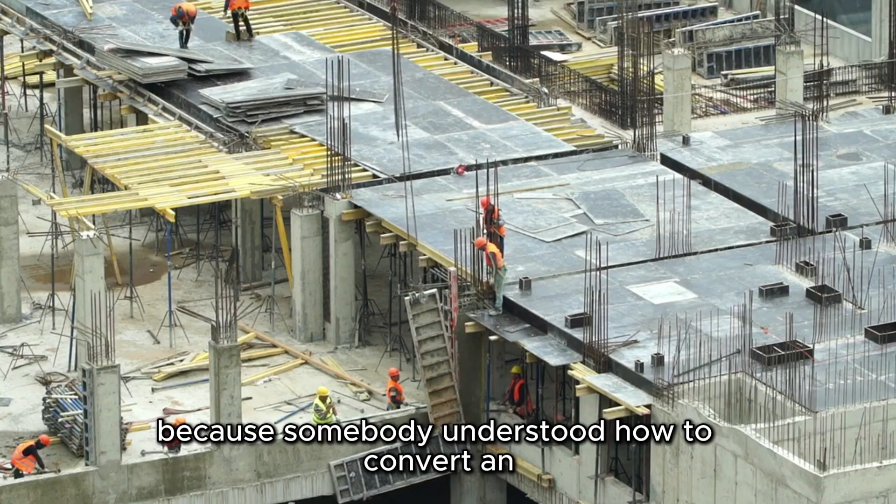Whatever your background, I want all of you to understand one thing from the beginning: you are entering an industry that Australia cannot function without. Look around any Australian city, every house in which somebody sleeps, every apartment building, every hospital, every school, every university, every shopping centre, every factory, every office building, every warehouse, every aged care facility, every hotel, every car park, every community building, every piece of infrastructure connected to those buildings exists because somebody understood how to convert an idea, a drawing and a vacant piece of land into a completed physical structure.

That is construction. And construction is much bigger than laying bricks, pouring concrete, or installing timber framing. Construction is a complete value chain. It involves planning, design, approvals, estimating, contracts, procurement, materials, people, plant and equipment, safety, building codes, Australian standards, quality management, project management, supervision, inspection, certification, and ultimately, responsibility.

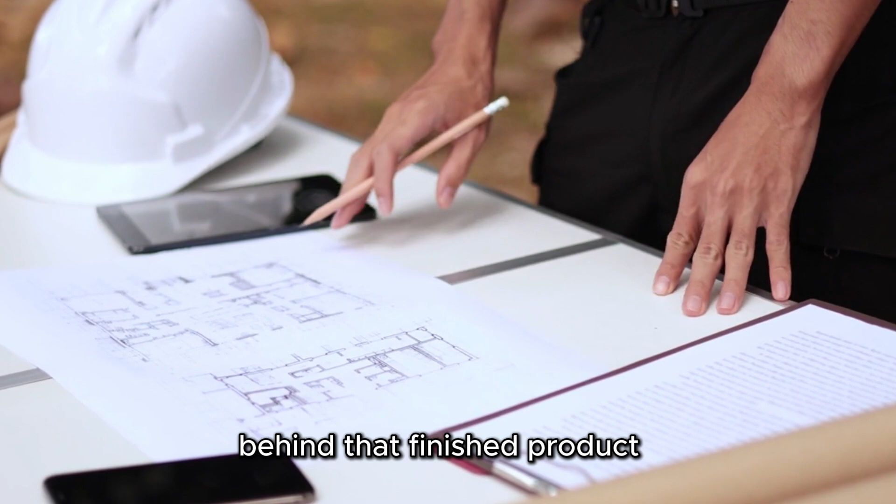As you progress through your Certificate 4 or Diploma of Building and Construction, I want you to change the way you see a building. Today, you may look at a house and simply see a house. By the end of your studies, I want you to look at that same house and see the site, the classification, the drawings, the footing system, the structural system, the materials, the trades, the construction sequence, the contracts, the cost, the risks, the Australian standards, the NCC requirements, the inspections, and the compliance obligations behind that finished product. That is the difference between simply looking at construction and understanding construction.

Before we begin discussing codes and classifications, I want you to understand why what you are studying matters. Australia is facing a major housing challenge. Under the National Housing Accord, Australia is working towards delivering 1.2 million new well-located homes over 5 years.

Government and industry forecasts have repeatedly shown that actual construction is struggling to keep pace with this enormous requirement. Depending on the forecast and the time at which it was prepared, projected gaps have been in the order of hundreds of thousands of dwellings. One official forecast projected a shortfall of approximately 262,000 homes, in other words, close to 300,000 homes against the target.

Think about what that means. We are not discussing 300 houses. We are not discussing 3,000 houses. We are talking about a challenge measured in hundreds of thousands of homes. Behind every one of those homes are families: young Australians trying to purchase their first property, people trying to find affordable rental accommodation, new families, older Australians, migrants, workers, students, communities.

So when Australia talks about solving the housing problem, there is something very important that we must remember. You cannot solve a housing shortage without constructing housing, and you cannot construct housing without people. You need tradespeople, you need supervisors, you need estimators, you need contract administrators, you need project managers, you need site managers, you need construction managers, you need building professionals who understand compliance.

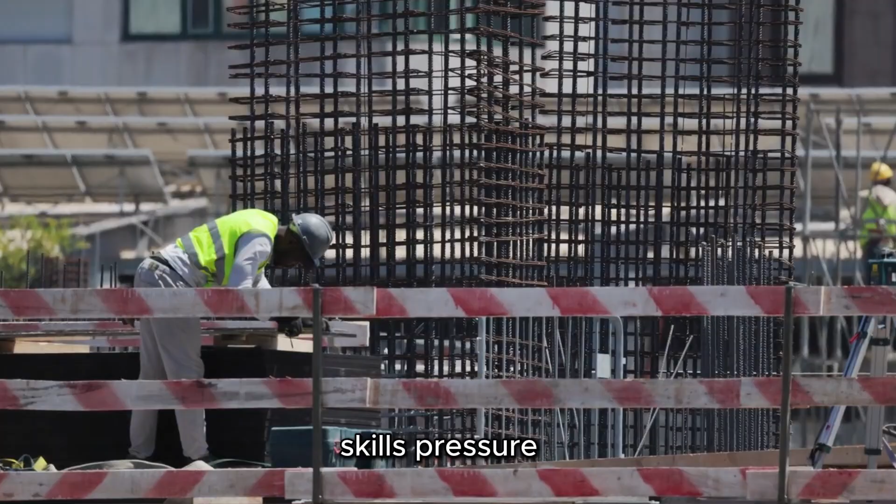Construction is already a major employer. Jobs and Skills Australia estimated the Australian construction workforce at approximately 1.348 million people in May 2025, with employment projected to grow to around 1.508 million by May 2035.

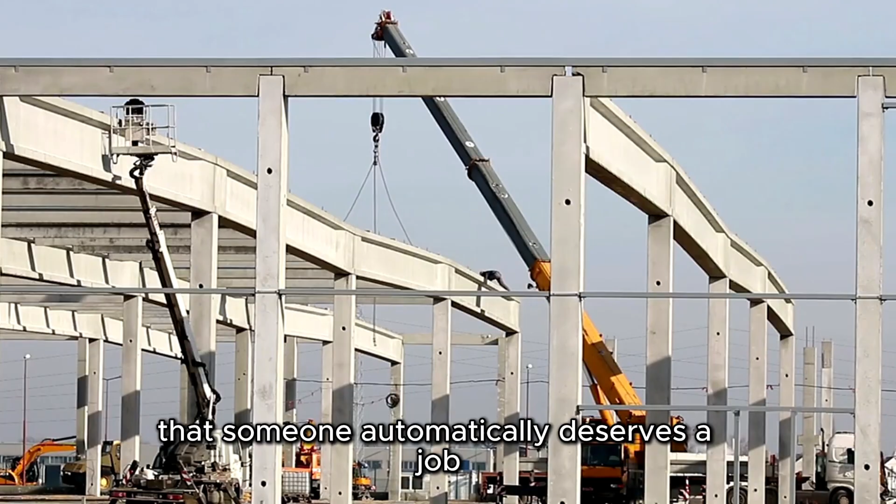So I want you to recognise the opportunity in front of you. But I also want to make something very clear. A skills shortage does not mean that someone automatically deserves a job. A qualification does not automatically make somebody a competent builder. An employer does not employ a certificate. An employer employs a person who can demonstrate knowledge, judgment, communication, responsibility, and competence.

Therefore, your responsibility during this course is not merely to pass assessments. Your responsibility is to become somebody that the construction industry wants.

Someone who can walk onto a construction site and understand the conversation. Someone who can read a drawing. Someone who understands specifications, someone who knows the difference between a regulation and a standard.

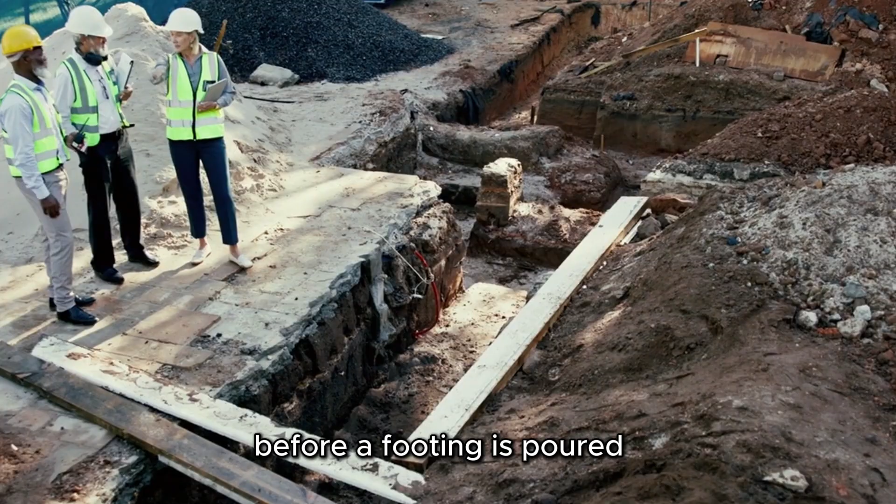Someone who understands what happens before a footing is poured and what happens after lock-up. Someone who can communicate with a carpenter, concreter, engineer, architect, surveyor, building surveyor, supplier, and client. That is what professional development means.

There is something I want every student to understand from your first day. Construction has its own language. Imagine arriving at a hospital and hearing doctors discussing a patient. They have terminology that allows them to communicate precisely. Construction is exactly the same.

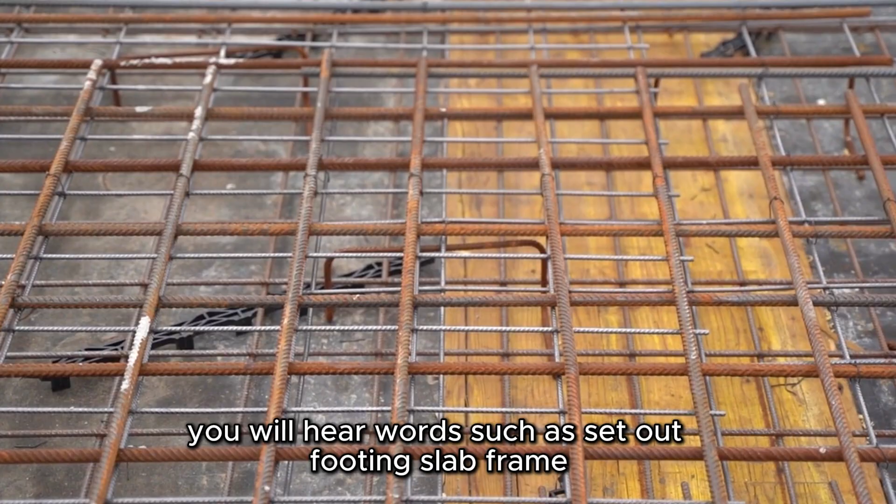On a building site, you'll hear words such as set out, footing, slab, frame, load-bearing, non-load-bearing, RL, datum, specification, tolerance,

variation, prime cost, provisional sum, lock-up, fixing, finishing, RFI, SWMS, NCC, BCA, Australian Standard, performance requirement, deemed to satisfy, contractor, subcontractor, certifier, building surveyor, and occupancy.

These words are not simply academic vocabulary, they are working tools. If somebody says, 'We have reached lock-up,' you need to understand what that means in the construction sequence. If an engineer refers to structural loads, you must understand the context.

If the drawing and specification contain different information, you must know how to investigate it. If a contract contains a requirement that refers to an Australian standard, you need to recognise its importance.

If a building surveyor asks how a proposed solution demonstrates compliance, you need to understand the question.

That is why I encourage you from today to create your own construction vocabulary. Every time you encounter an unfamiliar term, write it down. Find the definition. Understand it.

Use it. Do not simply memorize the word for an assessment. Connect that word with what happens on a real project.

Because one of the biggest transitions you will make in this program is moving from simply knowing how to do a task to understanding why the task is performed in that particular way. That is the transition from trade thinking to supervisory and management thinking.

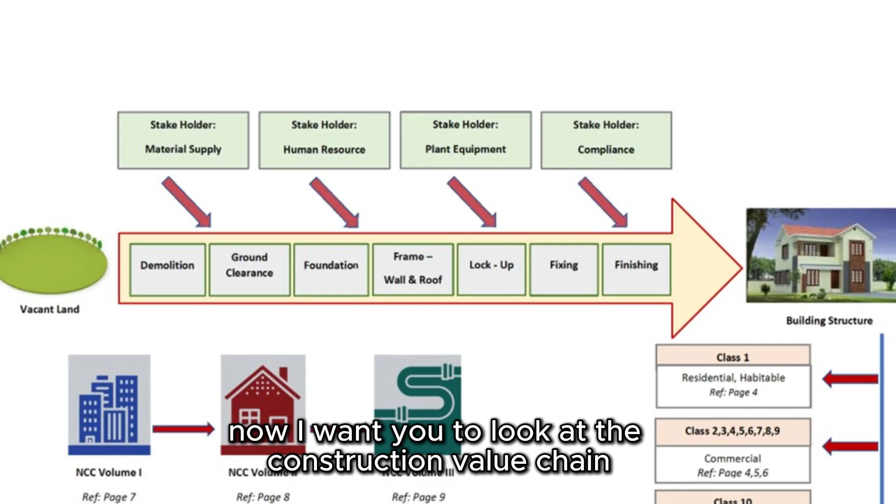Now I want you to look at the construction value chain diagram in your presentation.

At one side, we have vacant land. At the other side, we have a completed building structure. Between those two points is an entire industry.

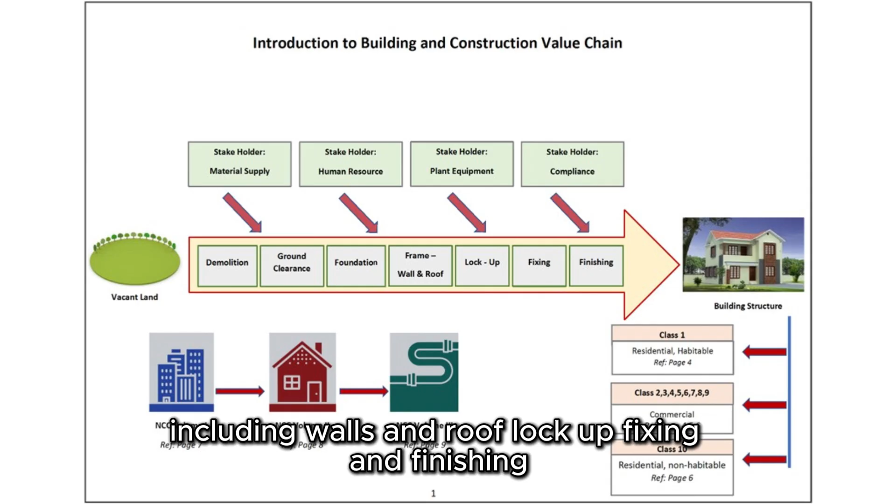The presentation takes us through the physical construction sequence: demolition, ground clearance, foundation, frame, including walls and roof, lock-up, fixing and finishing. Let us think about what happens.

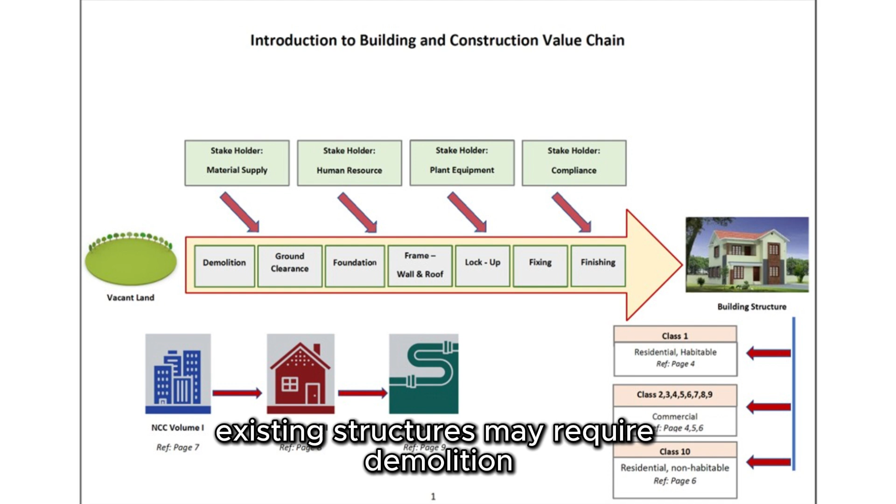We begin with the land. Before construction can properly commence, existing structures may require demolition. Then comes ground clearance and preparation.

But even before we start digging, many questions have already been asked. Who owns the land? What is permitted on the site? What is the building classification? What approvals are required? Where are the boundaries?

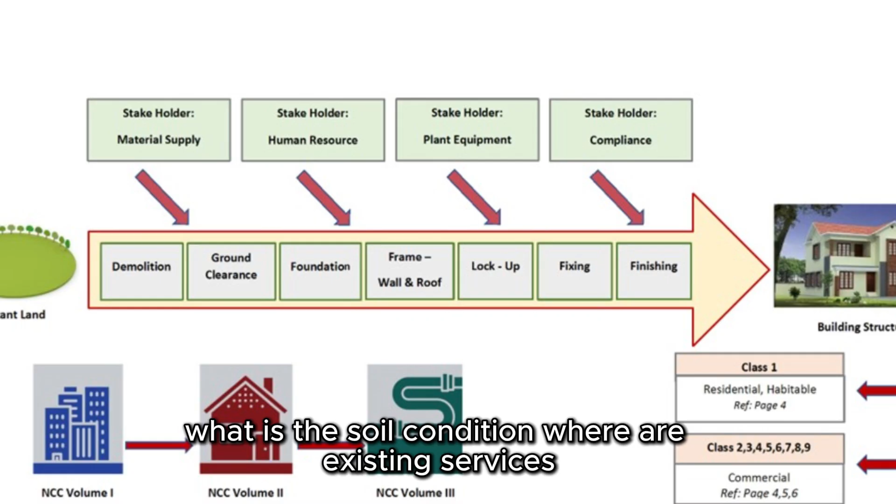What is the soil condition? Where are existing services? What drawings have been approved? What does the contract require?

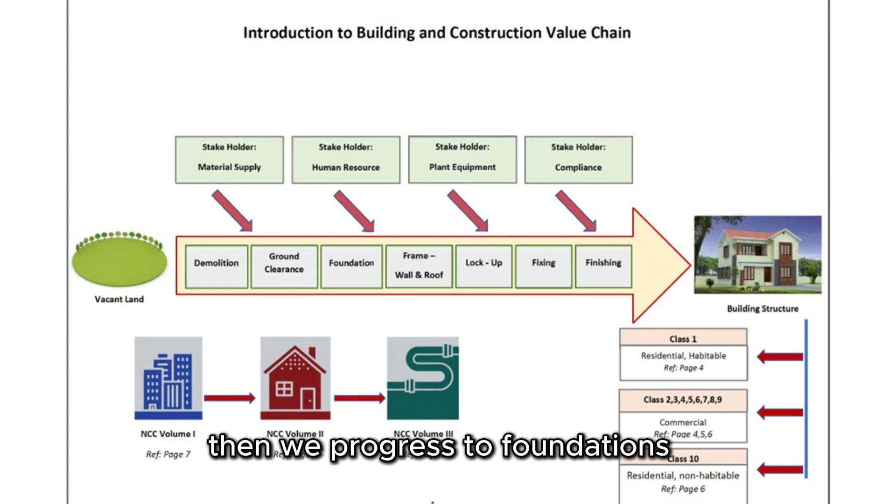Then we progress to foundations. The foundation transfers loads from the building into the ground. That means structural design, soil conditions, concrete, reinforcement and tolerances become important.

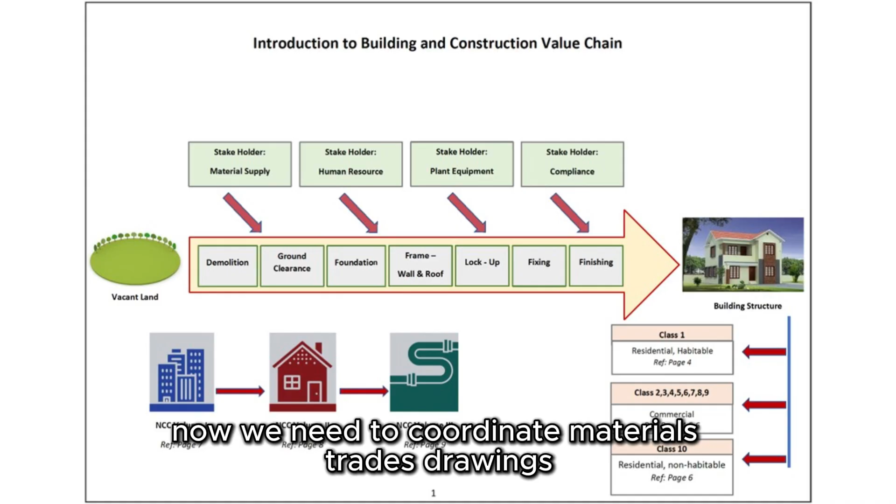After foundations, we move towards the structural frame, the walls and the roof. Now we need to coordinate materials, trades, drawings, structural requirements and installation sequences. Then comes lock-up, then fixing, then finishing.

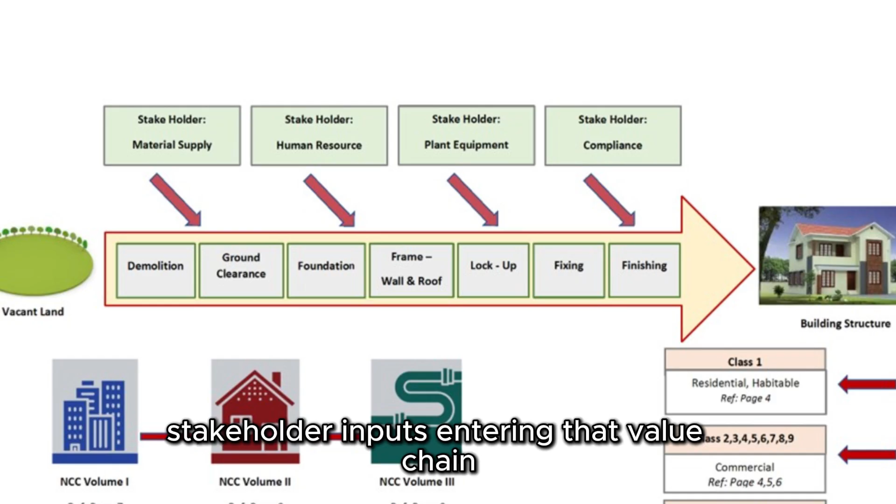And eventually we arrive at the completed structure. But look at the diagram again. The construction process does not operate by itself. The presentation identifies four major stakeholder inputs entering that value chain: material supply, human resources, plant and equipment, and compliance.

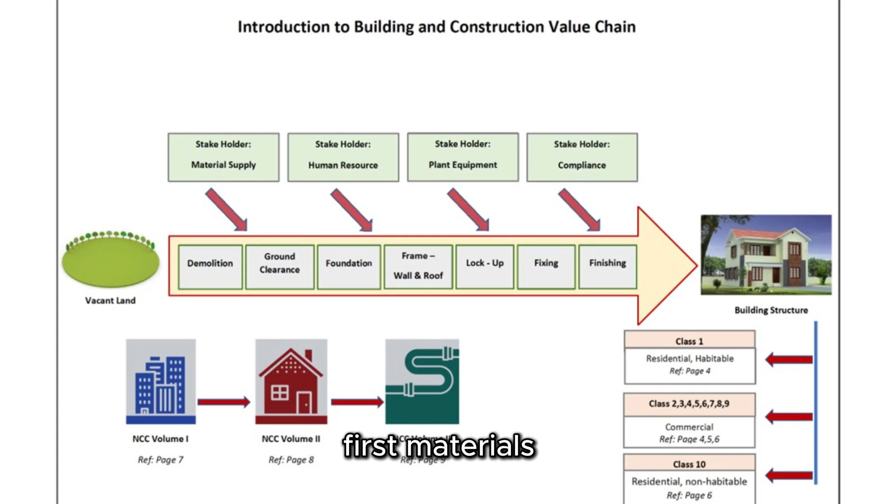Think about those four. First, materials. You cannot construct without concrete, reinforcement, timber, steel, masonry, plasterboard, waterproofing products, insulation, glazing, roofing, and hundreds of other products.

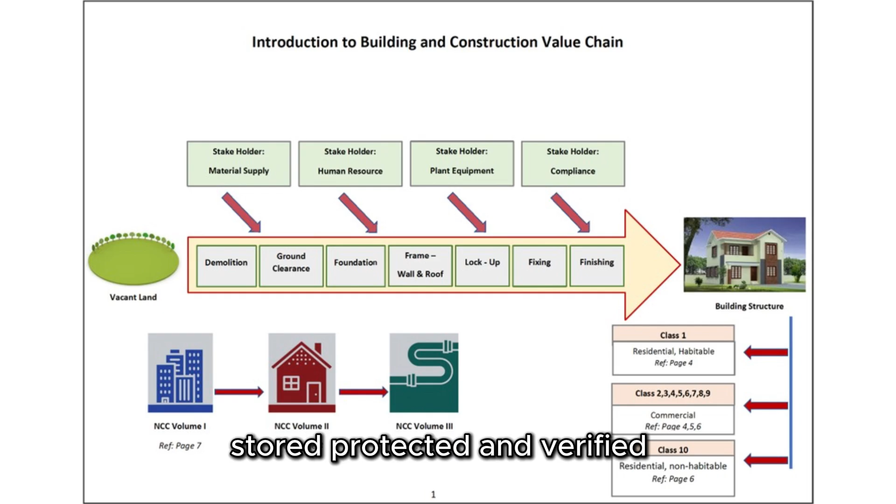Materials must be selected, ordered, scheduled, delivered, stored, protected, and verified. Second, human resources. Even with perfect drawings and unlimited materials, nothing happens unless skilled people perform the work.

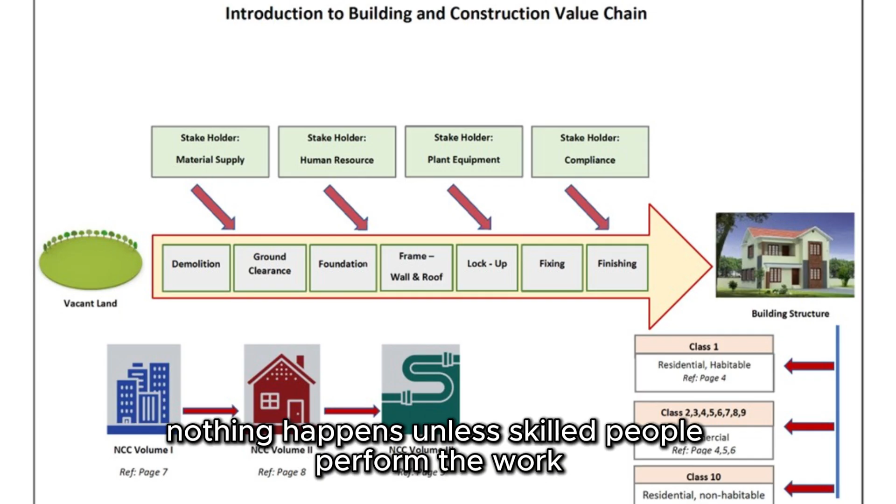Construction requires tradespeople, supervisors, engineers, designers, surveyors, suppliers, administrators, and managers working together.

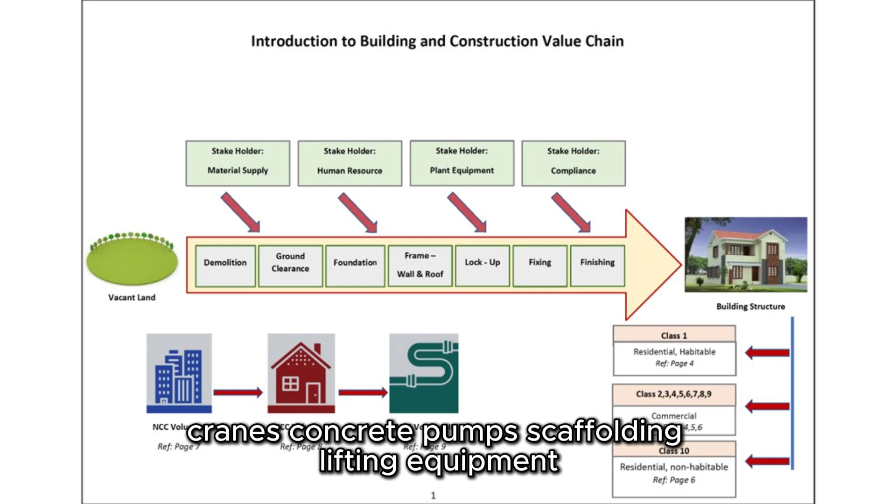Third, plant and equipment. Excavators, cranes, concrete pumps, scaffolding, lifting equipment, power tools, access equipment, testing equipment. Every stage requires appropriate resources.

And fourth, and this is extremely important, compliance. Compliance does not suddenly appear at the end when somebody asks for a certificate. Compliance must travel with the project from beginning to end.

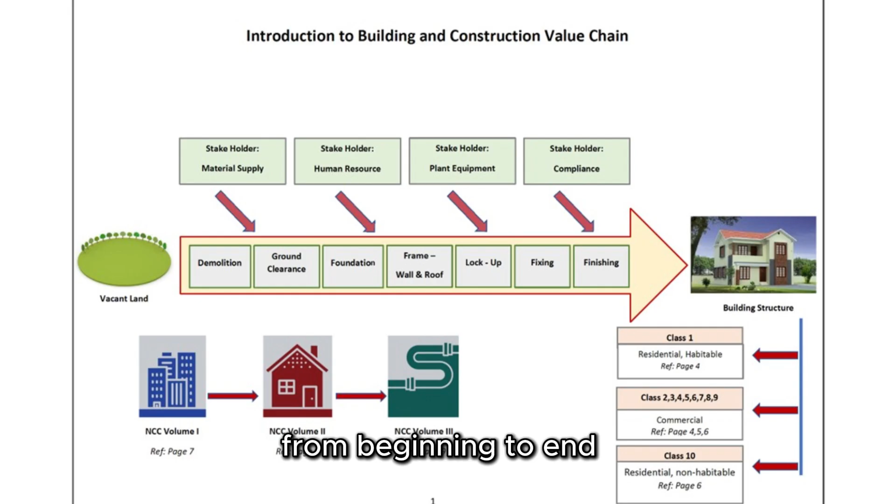That is one of the most important ideas I want you to remember from today's session. Compliance is not the final stage of construction. Compliance is part of every stage of construction.

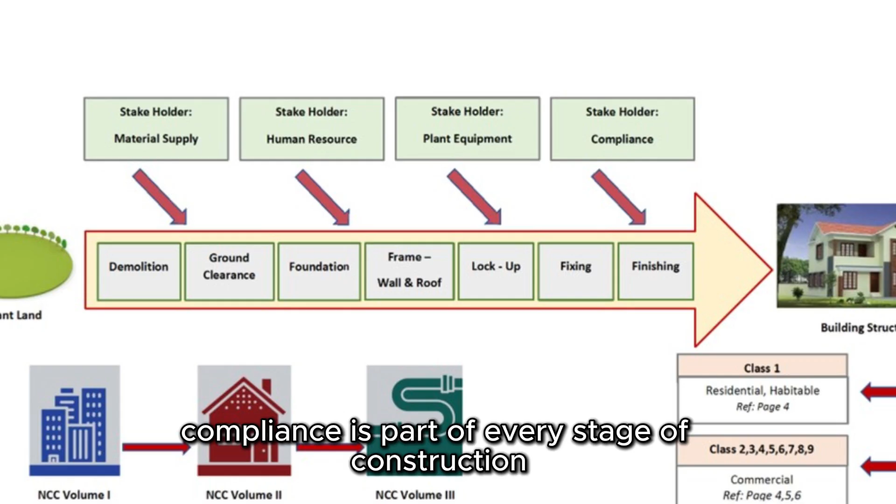This is why your Certificate 4 and diploma contains such a wide range of units. You are not studying unrelated subjects. They are different pieces of the same construction value chain.

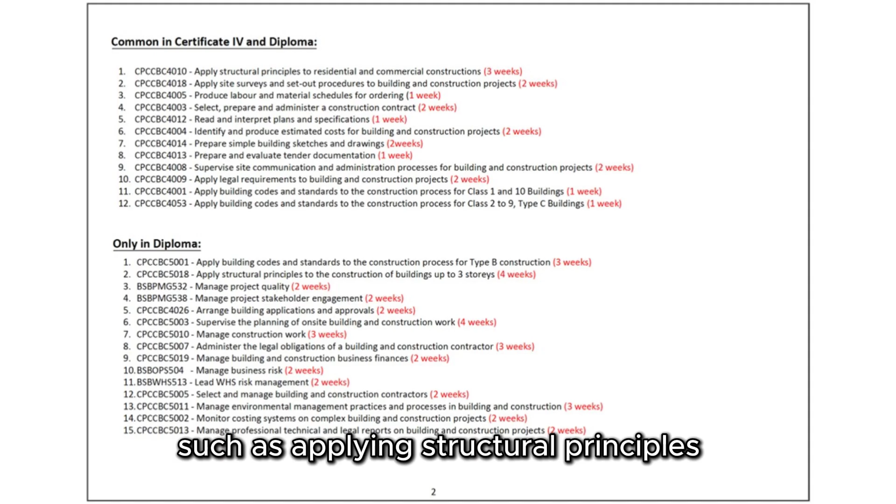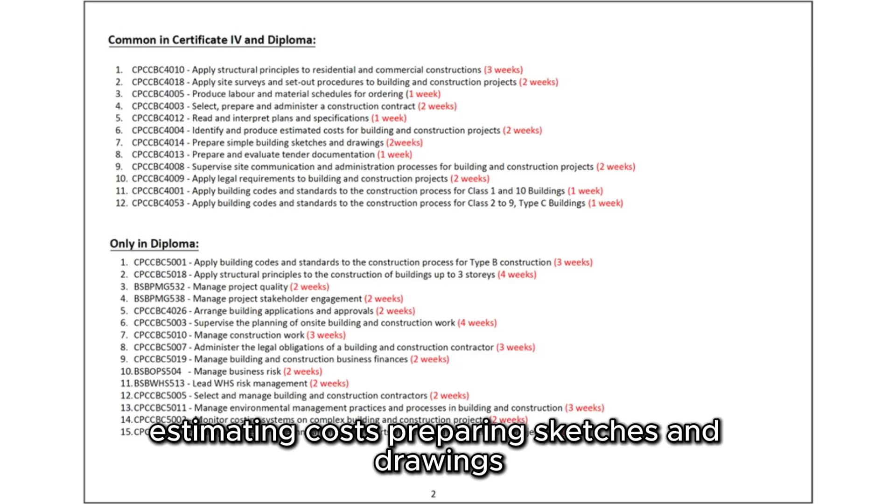Both programs address areas such as applying structural principles, site surveys and set out, labour and material scheduling, construction contracts, reading plans and specifications, estimating costs, preparing sketches and drawings, tender documentation, site communication and administration, legal requirements, and applying building codes and standards. Think about how beautifully those topics connect.

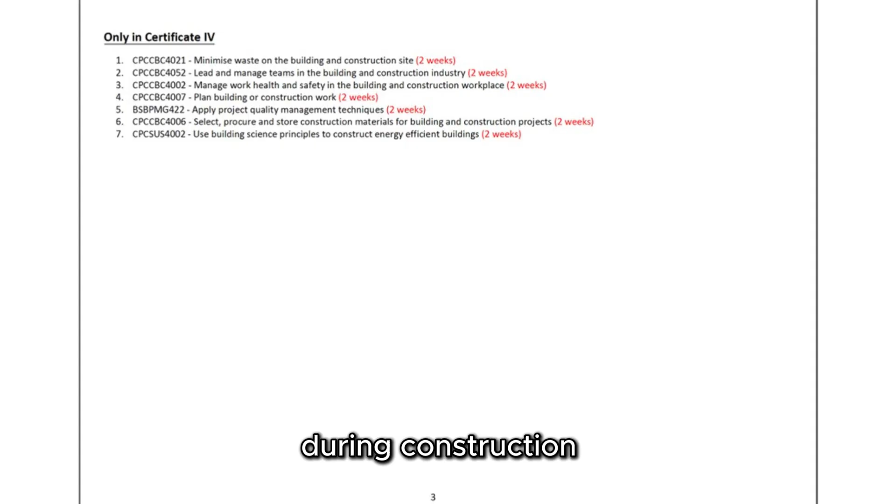Before construction: site surveys, planning, drawings, estimating and contracts. During construction: structural principles, materials, labour, supervision, communication, safety and quality. Across the whole project: legislation, codes, standards and contractual obligations.

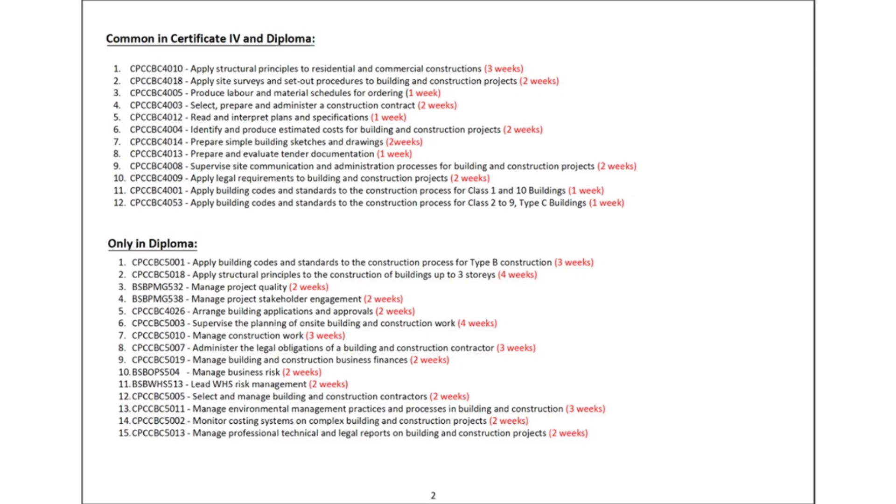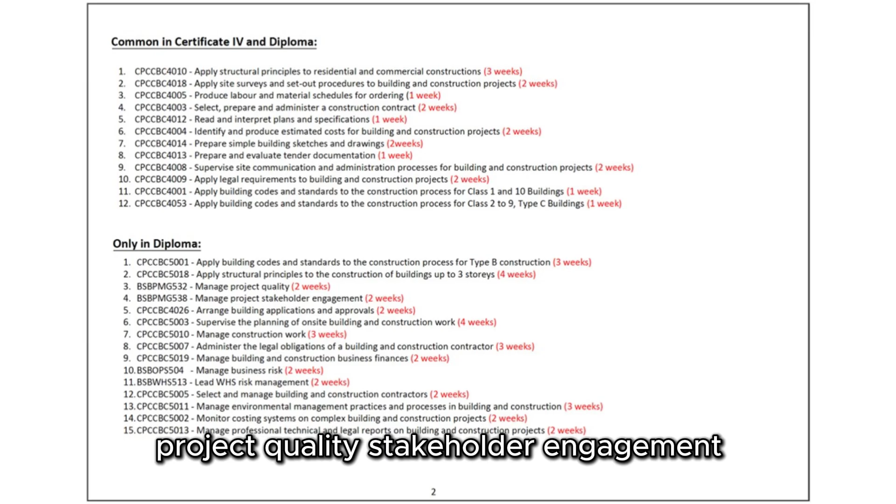For students undertaking the diploma, your learning moves further into management. The programme addresses Type B construction, structural principles for buildings up to 3 stories, project quality, stakeholder engagement, building applications and approvals, on-site planning, management of construction work, legal obligations, business finance, business risk, WHS risk, contractor management, environmental management, cost monitoring, and professional technical and legal reporting.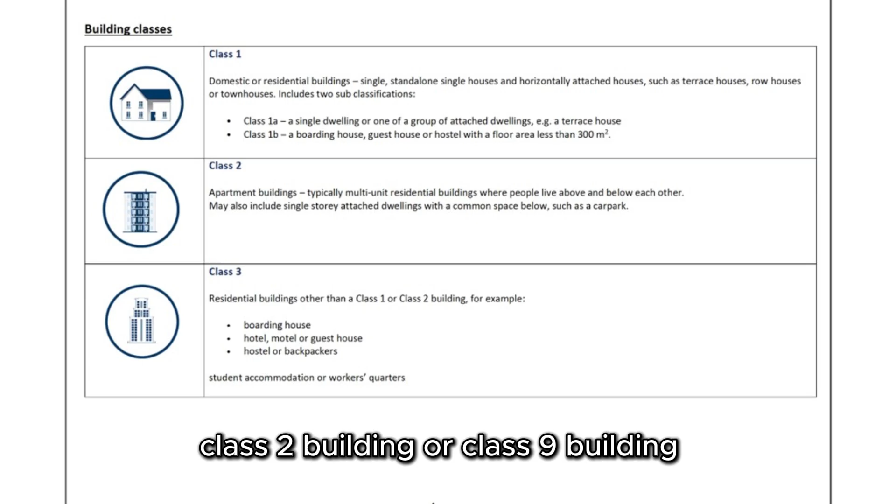Now we come to one of the most important pieces of vocabulary in the Australian building industry: building classification. When somebody tells you that a project is a Class 1 building, Class 2 building, or Class 9 building, that number is not simply a label. Classification tells us about the purpose and use of the building, and this connects directly with the NCC requirements that need to be considered. Let us move through the 10 classes.

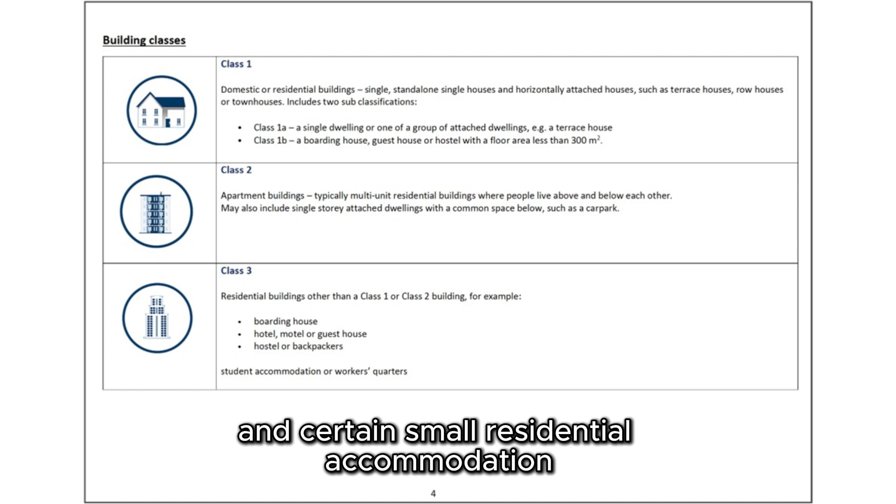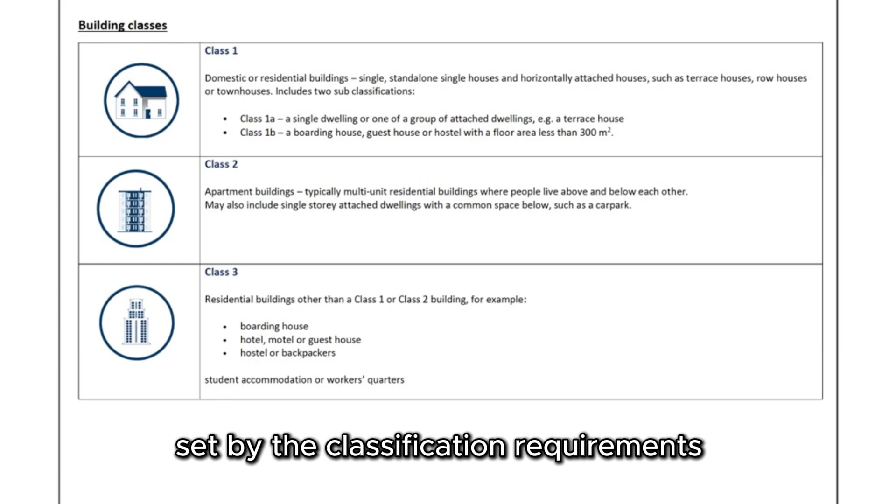Class 1 generally deals with houses and certain small residential accommodation. Class 1A includes a single dwelling or one of a group of attached dwellings, such as a terrace house, row house or townhouse. Class 1B can include a small boarding house, guest house or hostel within the parameters set by the classification requirements. When many people imagine building, Class 1 is often what they first visualise, the Australian house. But our industry goes far beyond houses.

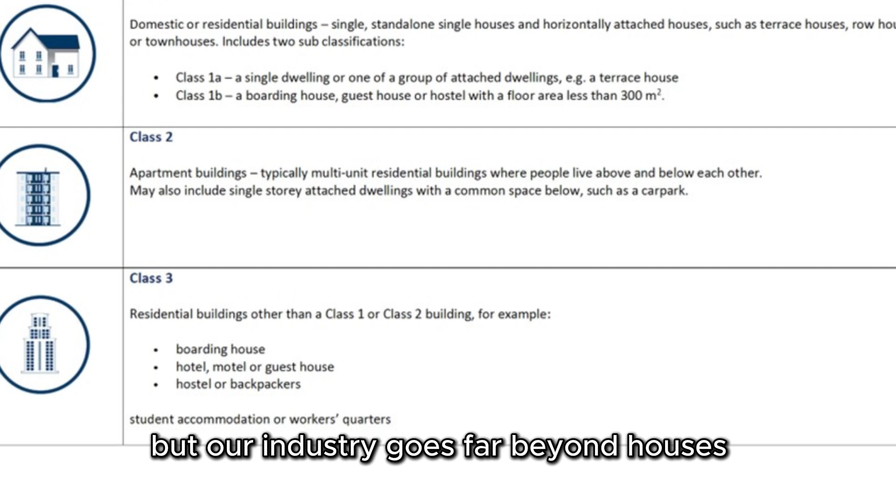Class 2 concerns apartment-style buildings, buildings containing separate dwellings where people may live above or below one another. Once we move into multi-unit residential construction, coordination and compliance become increasingly complex. You are dealing with multiple occupants, shared building elements, fire separation, access, services, acoustic considerations, and many other requirements.

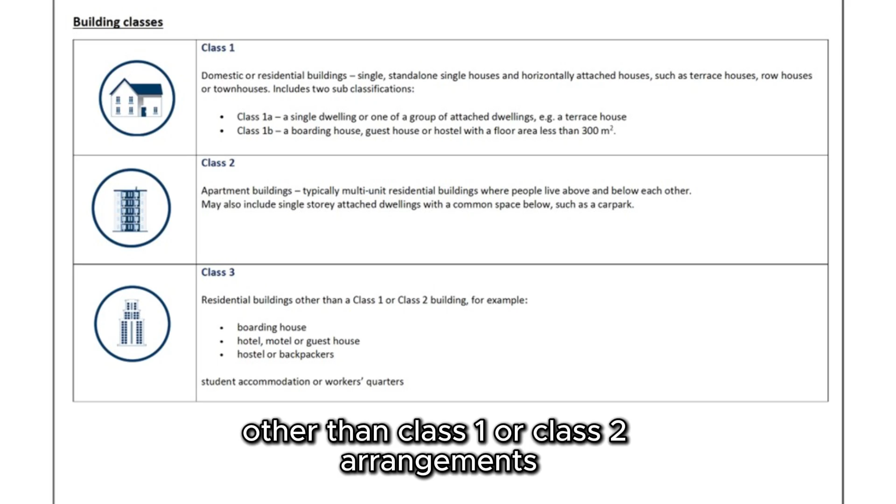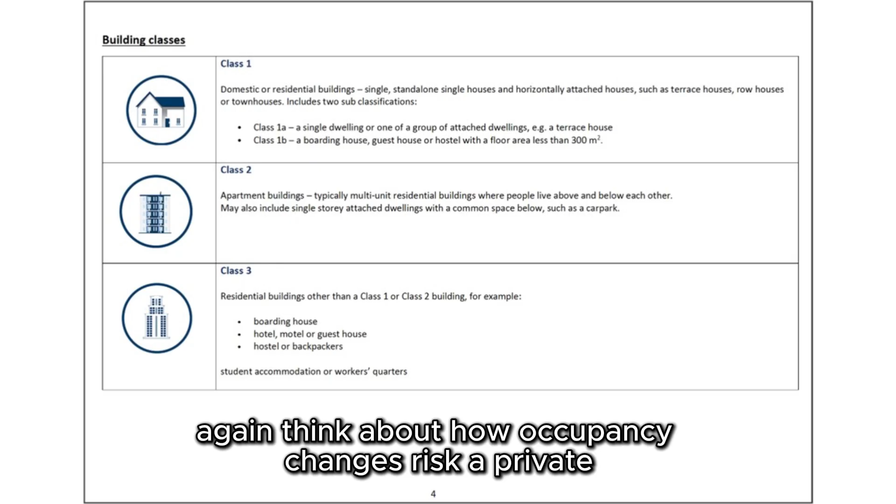Class 3 covers residential buildings other than Class 1 or Class 2 arrangements described in the presentation. Examples include certain boarding houses, hotels, motels, guest houses, hostels, backpacker accommodation, student accommodation, and workers' quarters. Again, think about how occupancy changes risk. A private house occupied by one family is not identical to a building in which many unrelated people sleep. That is one reason classification matters.

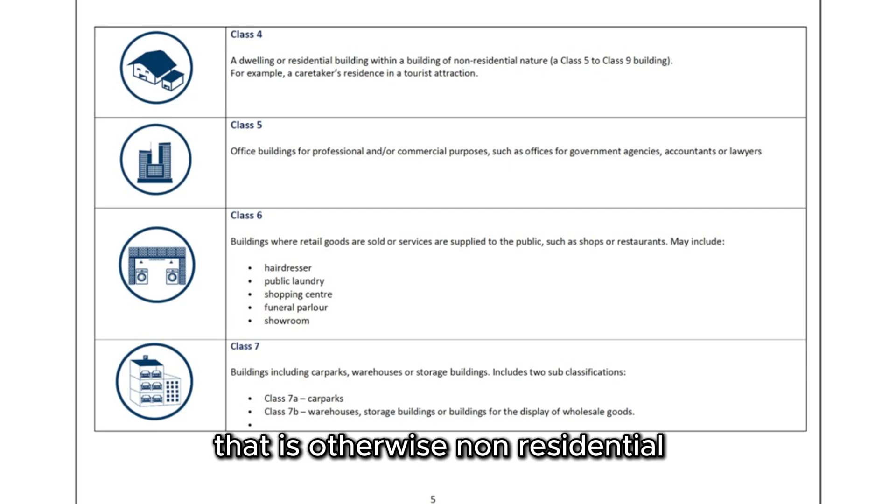Class 4 is particularly interesting. It is a dwelling located within a building that is otherwise non-residential, typically within a Class 5 to Class 9 building. The example in your presentation is a caretaker's residence associated with another type of building. So one physical structure may contain areas serving different purposes. This is why classification requires understanding rather than simply memorizing 10 numbers.

Class 5 is an office building used for professional or commercial purposes. Think about offices occupied by accountants, lawyers, government agencies, and other professional organisations.

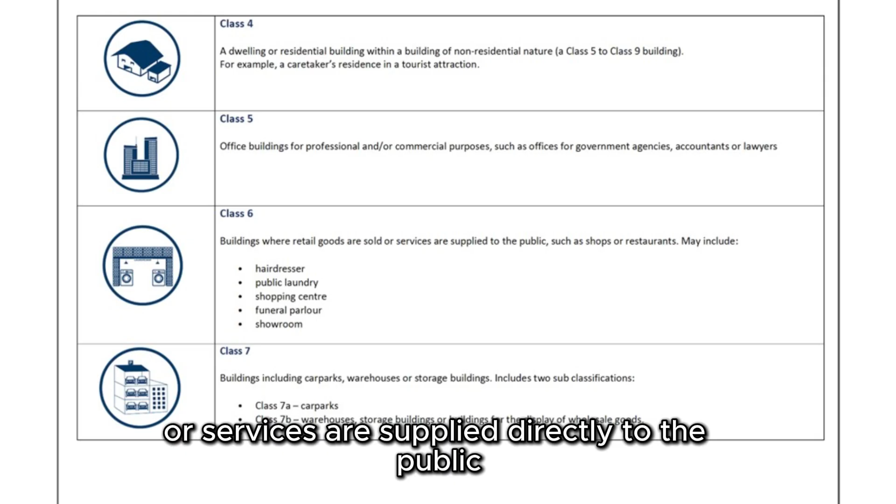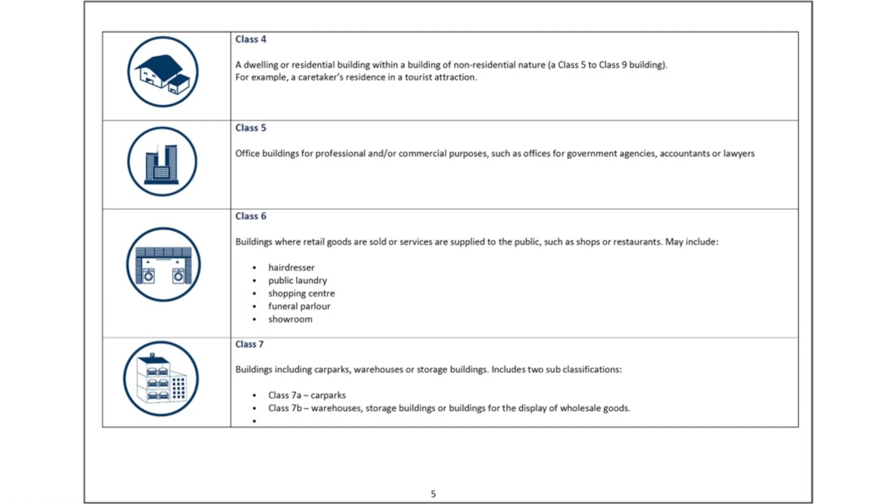Class 6 generally involves buildings in which goods are sold or services are supplied directly to the public. Examples from your presentation include shops, restaurants, hairdressers, public laundries, shopping centres, funeral parlours, and showrooms. Ask yourself, would the safety and access requirements of a public shopping area be exactly the same as those of a private home? Obviously not. The way a building is used affects the way it must perform.

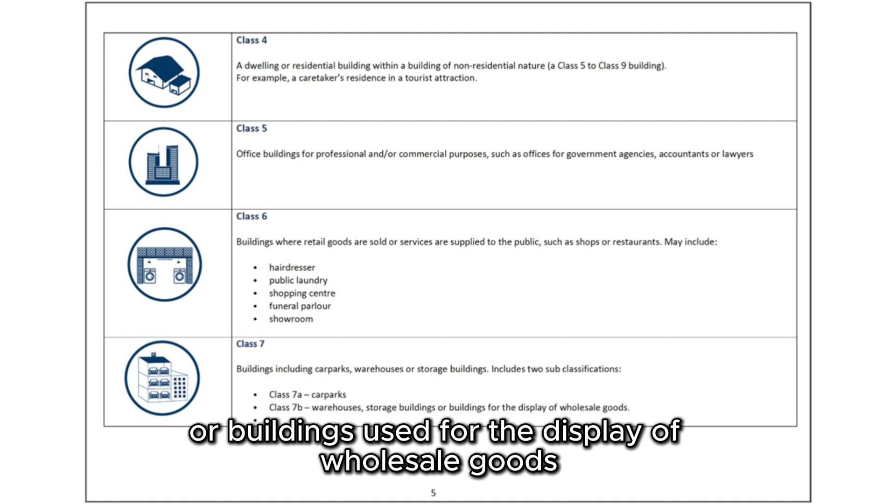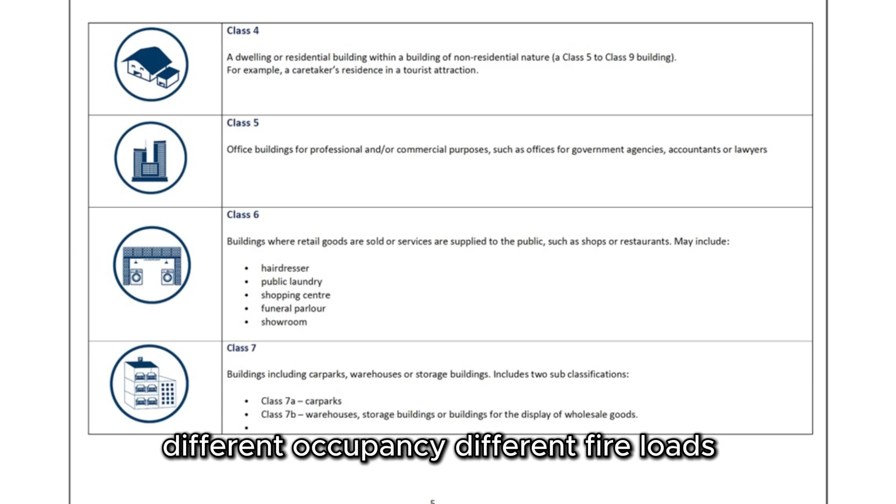Class 7 includes particular storage and car parking uses. Class 7A relates to car parks. Class 7B relates to warehouses, storage buildings, or buildings used for the display of wholesale goods. Think about the completely different activities that can happen inside a warehouse compared with an apartment. Different occupancy, different fire loads, different circulation, different services, and different risks.

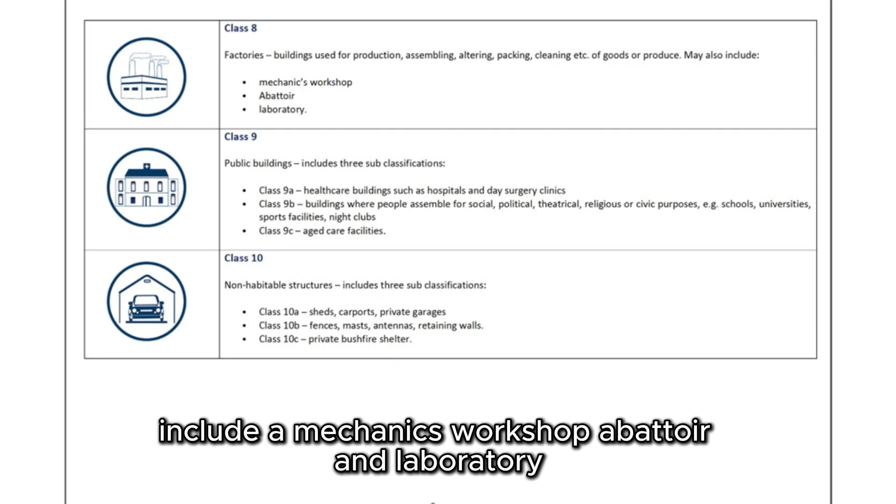Class 8 generally relates to process-type buildings, such as factories and buildings used for production, assembling, altering, packing, or cleaning goods or produce. The examples in the presentation include a mechanics workshop, abattoir, and laboratory. Again, the use of the building determines the risks that must be considered.

Class 9 relates to public buildings and is divided into important subclasses. Class 9A includes healthcare buildings such as hospitals and day surgery clinics.

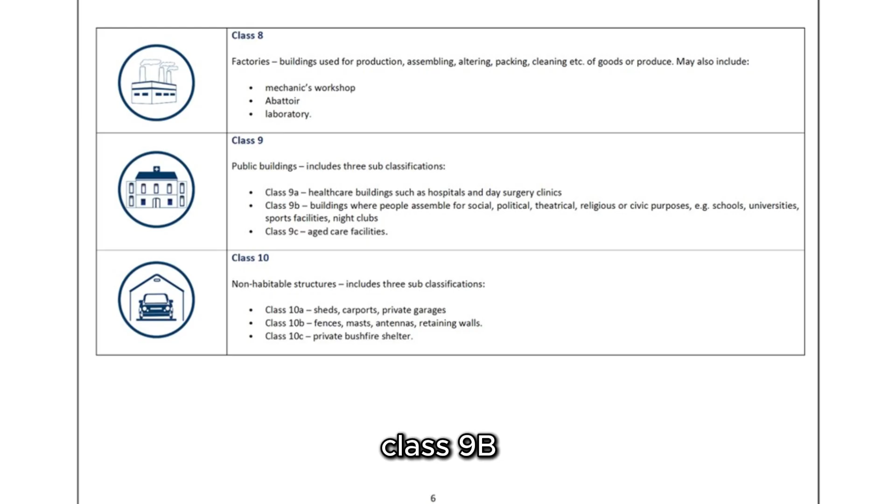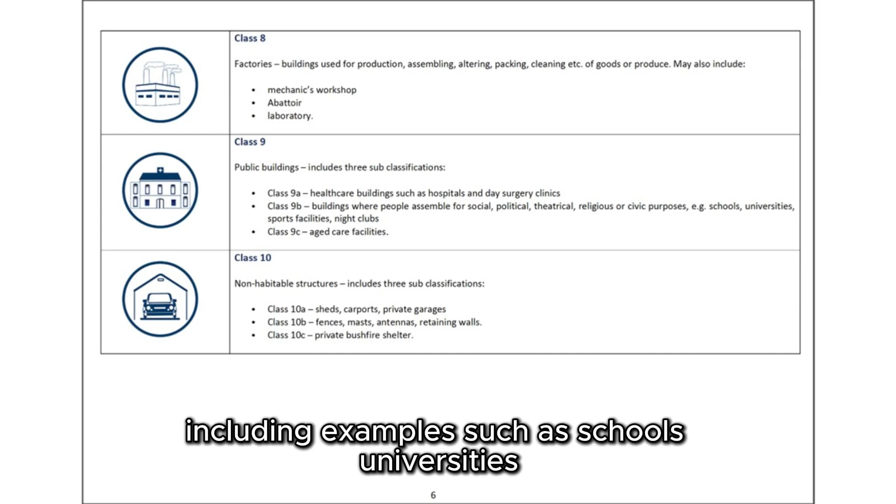Class 9B includes buildings where people assemble for social, theatrical, political, religious, educational, sporting or civic purposes, including examples such as schools, universities, sporting facilities and nightclubs.

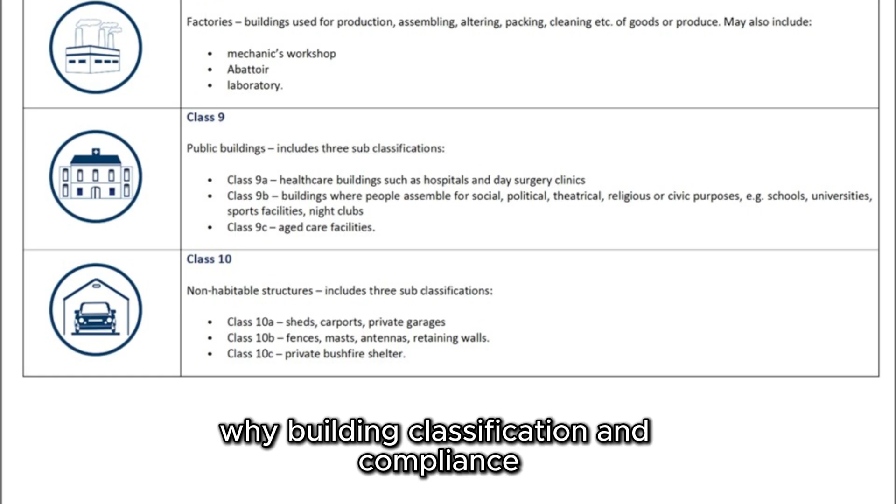Class 9C includes aged care facilities. Think about the people who might occupy a hospital or aged care facility. Some occupants may not be able to evacuate quickly or independently. This demonstrates why building classification and compliance cannot be separated.

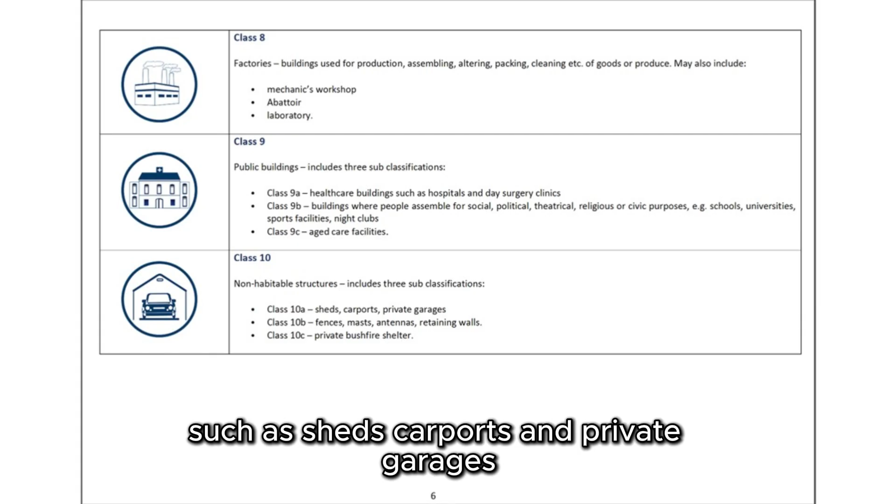Finally, Class 10 concerns non-habitable buildings and structures. Your presentation identifies Class 10A, such as sheds, carports and private garages. Class 10B, structures such as fences, masts, antennas and retaining walls. And Class 10C, private bushfire shelters.

Now you can see the bigger picture. We have moved from a private dwelling in Class 1 all the way through apartments, accommodation, offices, retail, warehouses, factories, hospitals and other public buildings, and finally non-habitable structures.

So when somebody says, 'I work in construction,' my next question might be, what construction? Residential, commercial, industrial, healthcare, education, warehousing, retail. Each area is part of construction, but the compliance environment is not identical.

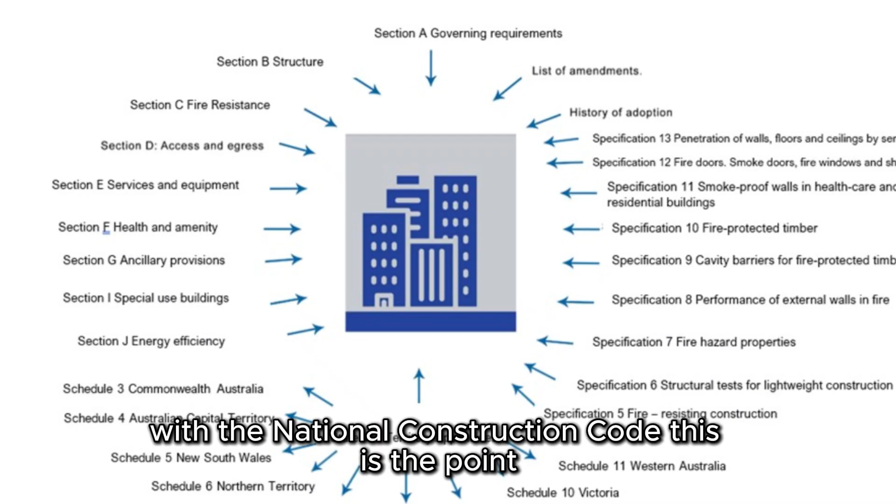Now we connect those classifications with the National Construction Code. This is the point where many new students initially become confused, so I want to make the relationship simple. Think of the NCC as the National Technical Framework. Within the framework presented in your learning materials, we have 3 volumes.

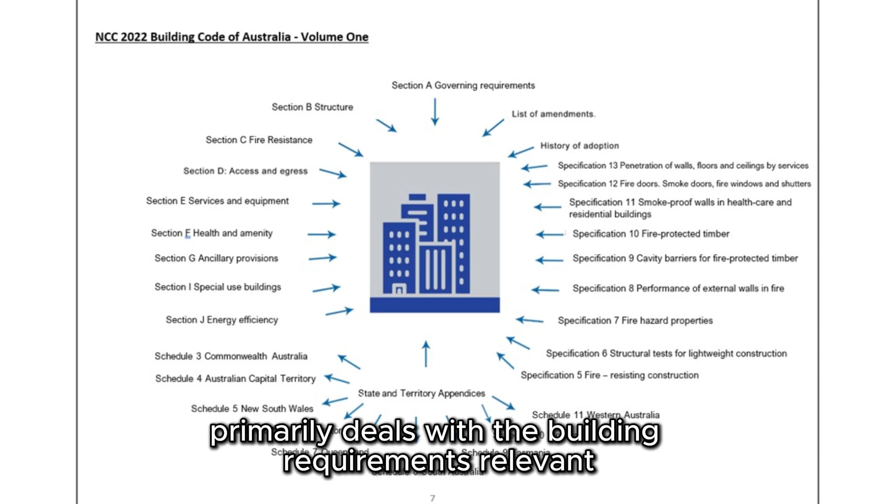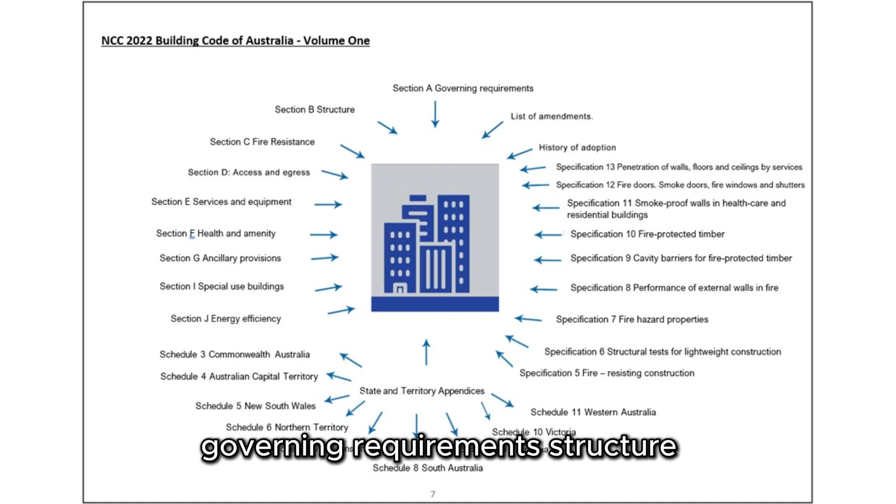NCC Volume 1 primarily deals with the building requirements relevant to the classes of buildings covered by that volume. Your presentation shows areas including governing requirements, structure, fire resistance, access and egress, services and equipment, health and amenity, ancillary provisions, special use buildings, and energy efficiency.

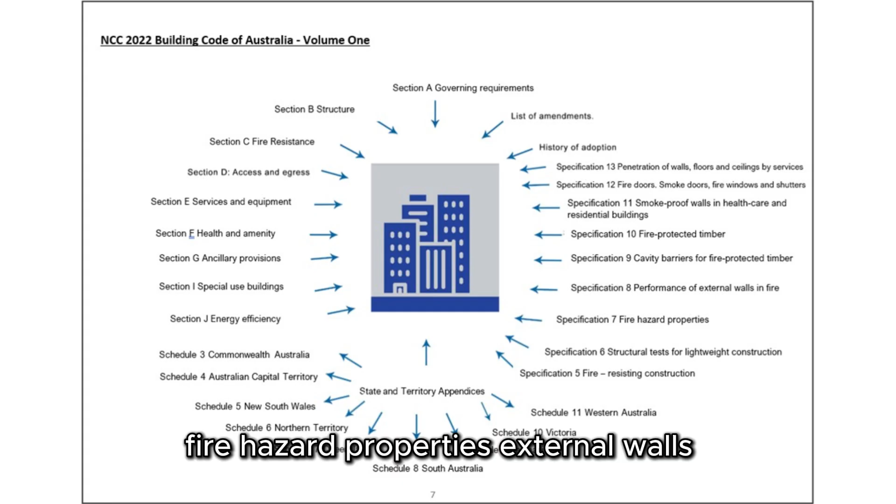It also contains specifications relating to matters such as fire-resisting construction, fire hazard properties, external walls, fire-protected timber, cavity barriers, smoke-proof walls, fire doors, and service penetrations.

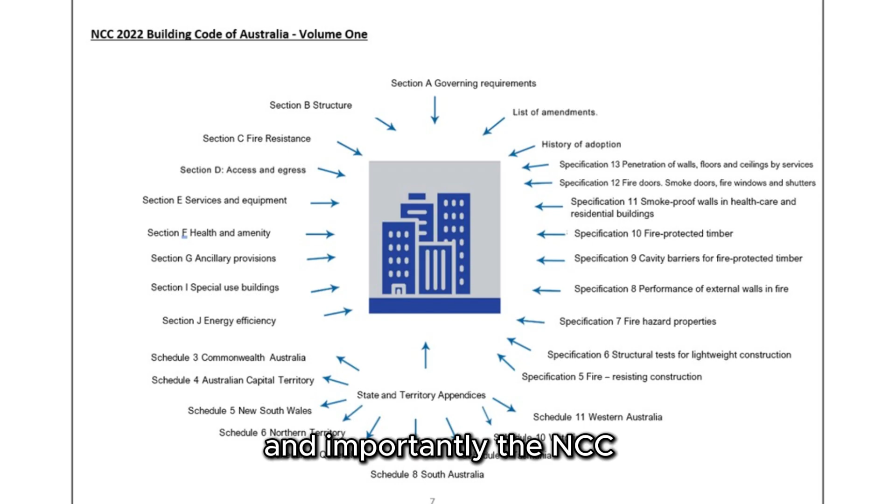And importantly, the NCC includes state and territory appendices. Therefore, you cannot study the national framework and then forget where the building is being constructed. A project in Victoria must be considered within the applicable Victorian legislative and regulatory environment. A national code and state or territory building legislation work together.

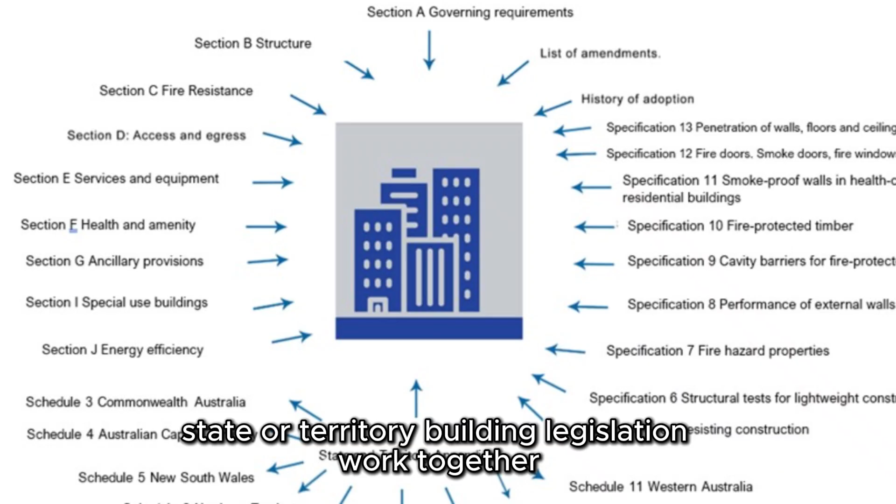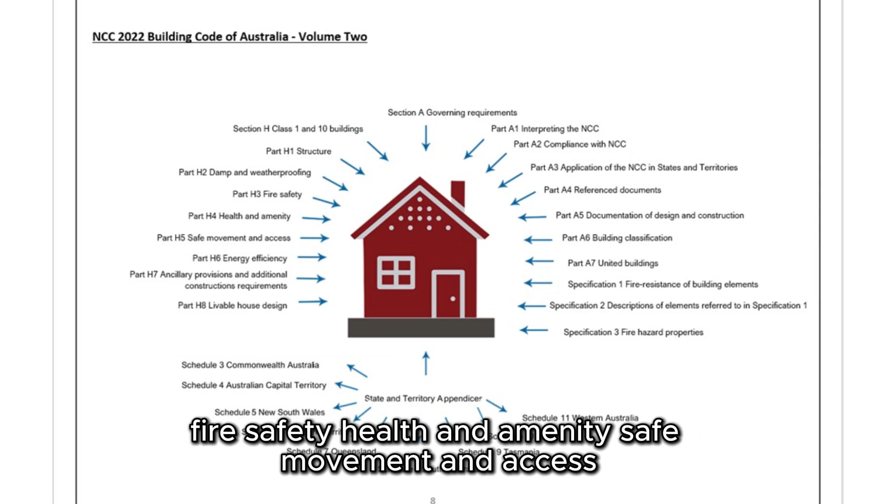NCC Volume 2, as illustrated in your presentation, connects strongly with Class 1 and Class 10 buildings. This includes requirements dealing with matters such as structure, damp and weatherproofing, fire safety, health and amenity, safe movement and access, energy efficiency, ancillary provisions, additional construction requirements, and livable housing design.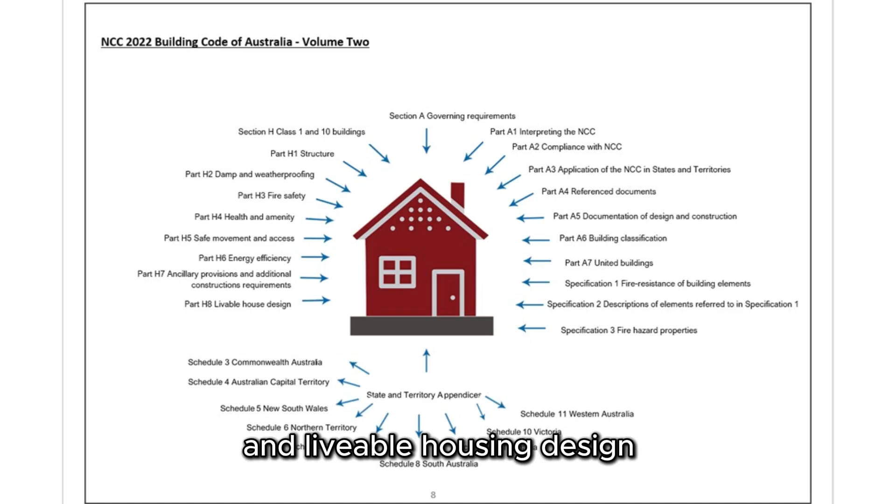You will also see governing provisions relating to interpreting the NCC, compliance application in states and territories, referenced documents, documentation of design and construction, classification and united buildings. This is why understanding classification comes before trying to navigate detailed requirements.

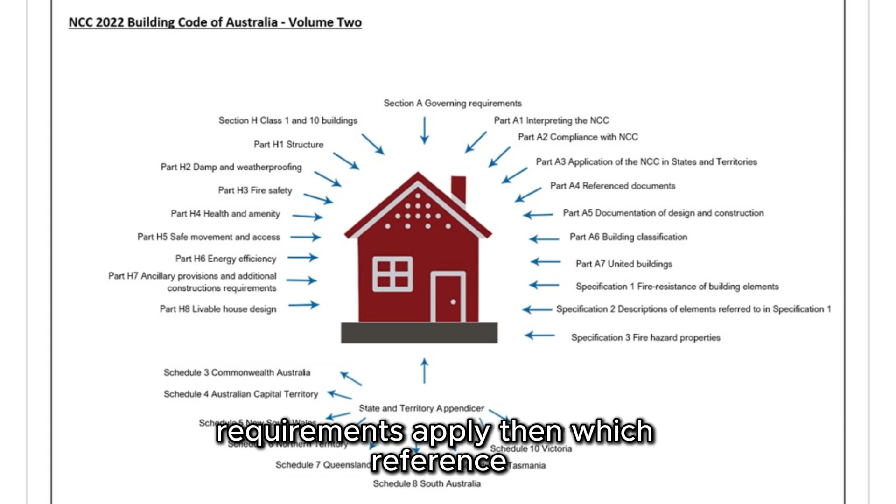First ask, what are we building? Then, how is it classified? And then, which NCC requirements apply? Then, which reference documents and Australian standards are connected to those requirements? That sequence of thinking will serve you throughout your career.

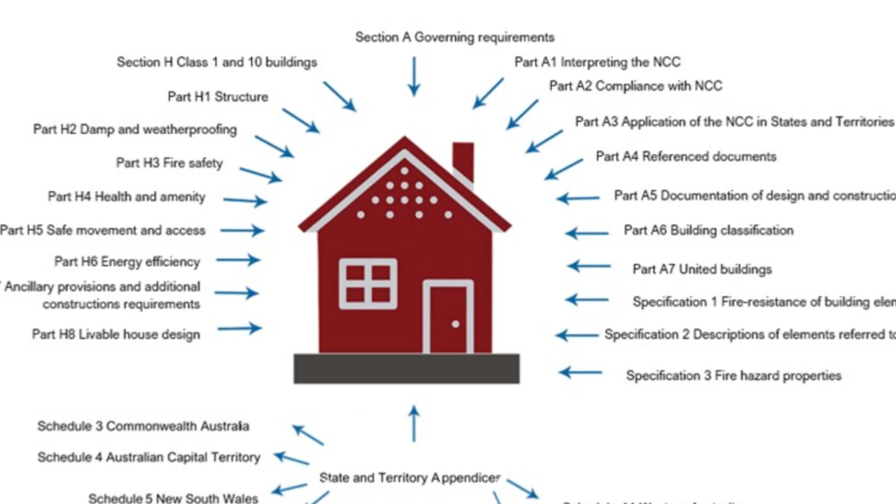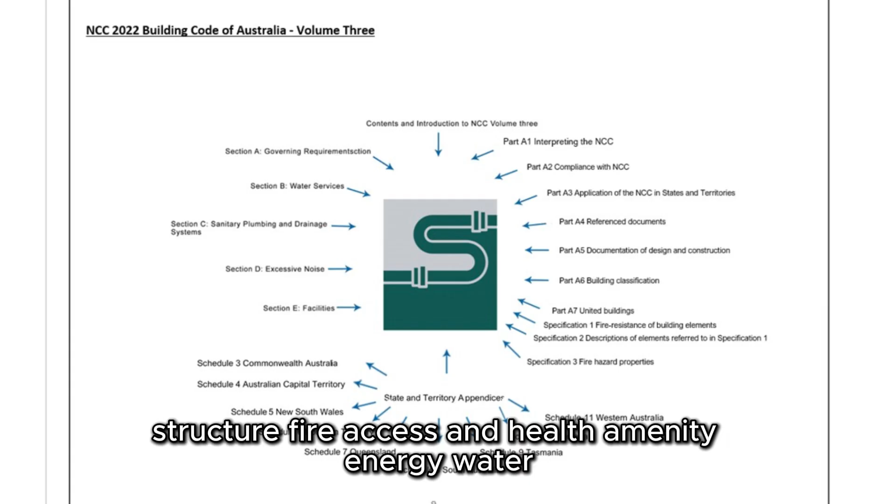So when we stand inside one completed building, we are actually looking at the result of many interconnected systems: structure, fire, access and health, amenity, energy, water, drainage, electrical systems and materials, workmanship, all connected.

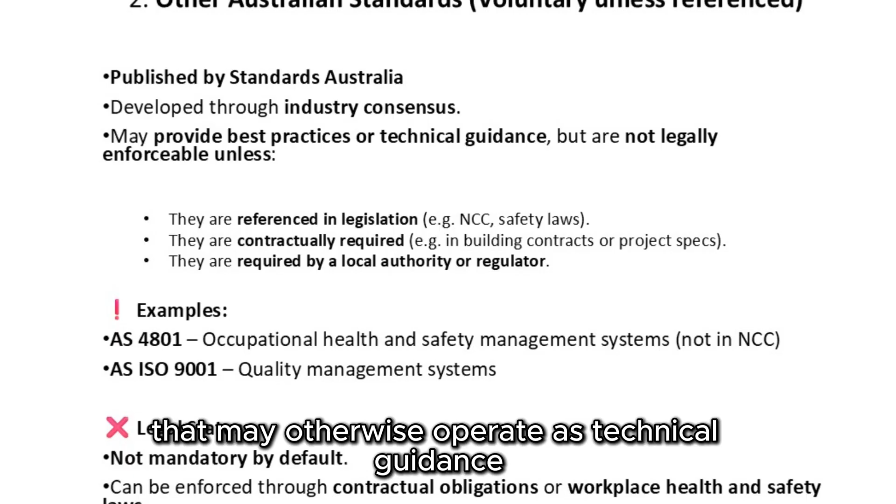Now we reach a very important compliance lesson. The PowerPoint explains that the Building Code of Australia, or the BCA, is represented by Volumes 1 and 2 of the NCC, and it distinguishes between standards that become mandatory through legislation, or NCC reference, and other Australian standards that may otherwise operate as technical guidance or become enforceable through contracts, WHS laws, or regulatory requirements.

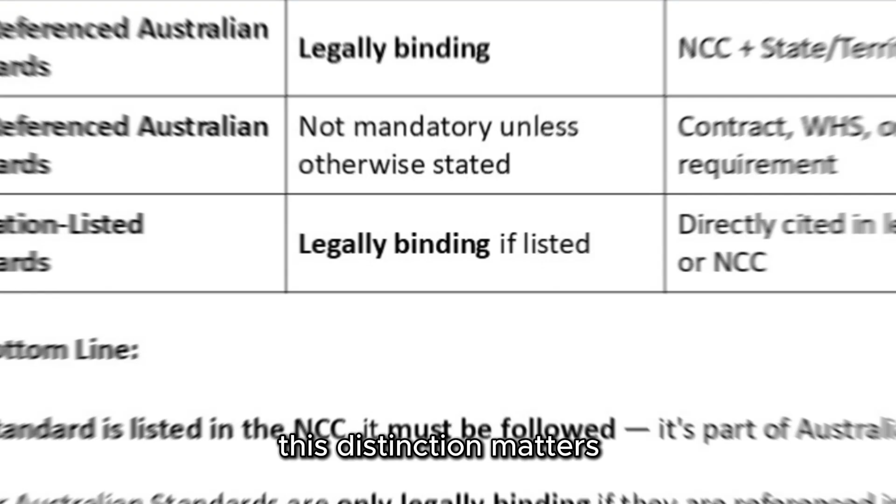This distinction matters. Students sometimes think it is an Australian standard, therefore every clause automatically has the force of law. That is too simplistic. The important question is, how has that standard become applicable to this project?

Has it been referenced by the NCC? Has legislation called it up? Has the building contract required it? Has the project specification required it? Has another regulatory requirement made it applicable? The presentation gives you several important examples.

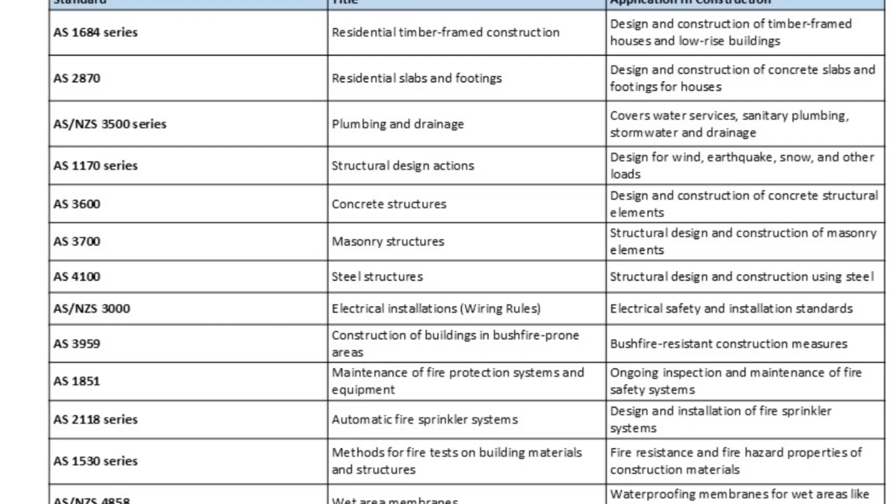AS1684 relates to residential timber-framed construction. AS2870 relates to residential slabs and footings.

AS-NZS 3500 deals with plumbing and drainage. AS-1170 deals with structural design actions. AS-3600 concerns concrete structures. AS-3700 concerns masonry structures. AS-4100 concerns steel structures. AS-NZS 3000 contains the wiring rules for electrical installations.

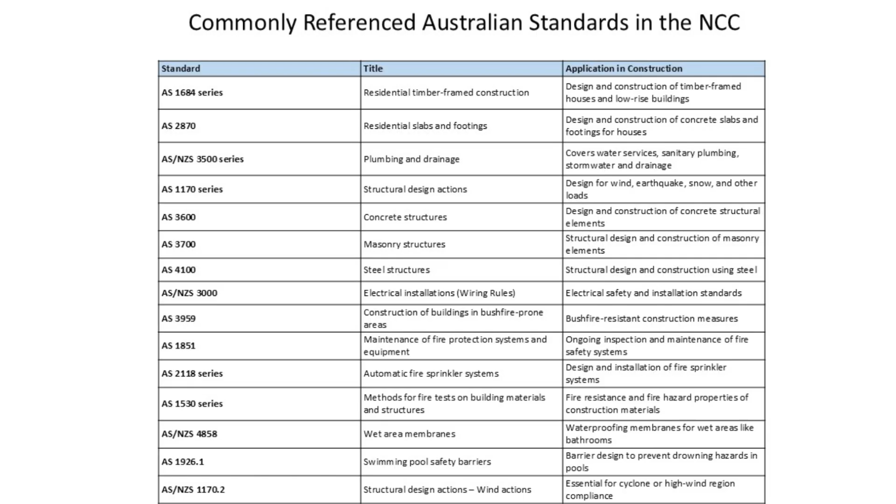AS-3959 relates to construction in bushfire-prone areas. AS-1851 addresses maintenance of fire protection systems and equipment. AS-2118 deals with automatic fire sprinkler systems. AS-1530 addresses fire testing of building materials and structures.

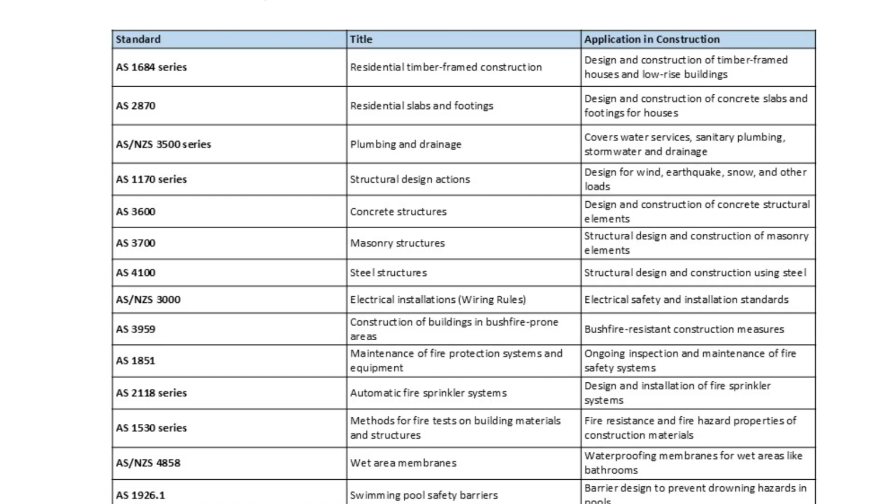AS-NZS 4858 addresses wet area membranes. AS-1926.1 deals with swimming pool safety barriers. And AS-NZS 1170.2 specifically addresses wind actions.

Now imagine being responsible for a project and not understanding these connections. A timber-framed house, a concrete slab, a masonry wall and a steel structure, a bathroom waterproofing system, a bushfire-prone site, a swimming pool, a fire sprinkler system. These are not isolated technical subjects. They form part of the regulatory and technical environment surrounding construction.

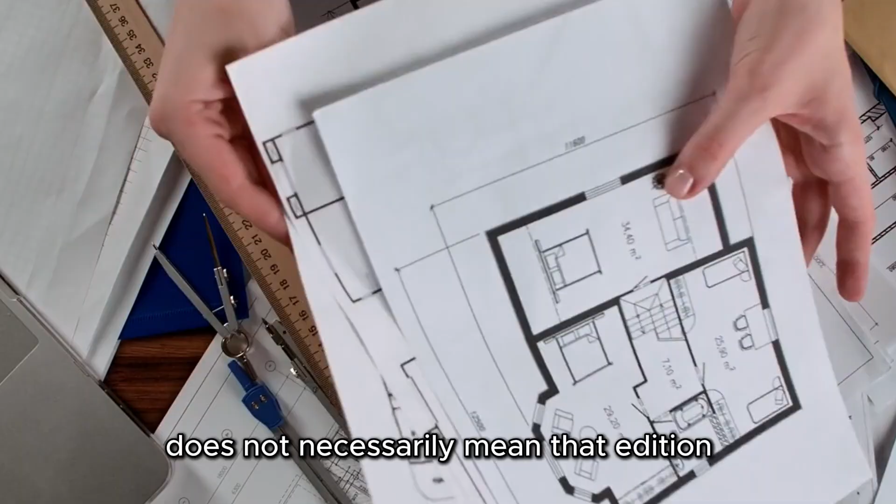Your presentation makes another important point. When an Australian standard is referenced through the NCC, the relevant referenced requirements become mandatory, but sometimes only particular sections or clauses are adopted. It also notes that publication of a newer edition does not necessarily mean that edition automatically becomes the applicable legal requirement. Adoption through the relevant NCC and regulatory framework matters.

That is why professional builders do not simply say, 'I remember what the standard said 5 years ago.' They check, they verify, they document, and if they are uncertain, they obtain appropriate professional advice. That is professional responsibility. Ladies and gentlemen, I want to finish where we started.

You are joining this program at an extraordinary time for the Australian construction industry. Australia needs housing. Australia needs infrastructure. Australia needs skilled tradespeople. Australia needs competent supervisors. Australia needs construction managers. Australia needs professionals who can manage quality, safety, cost, time and compliance. But above all, Australia needs people who are prepared to learn.

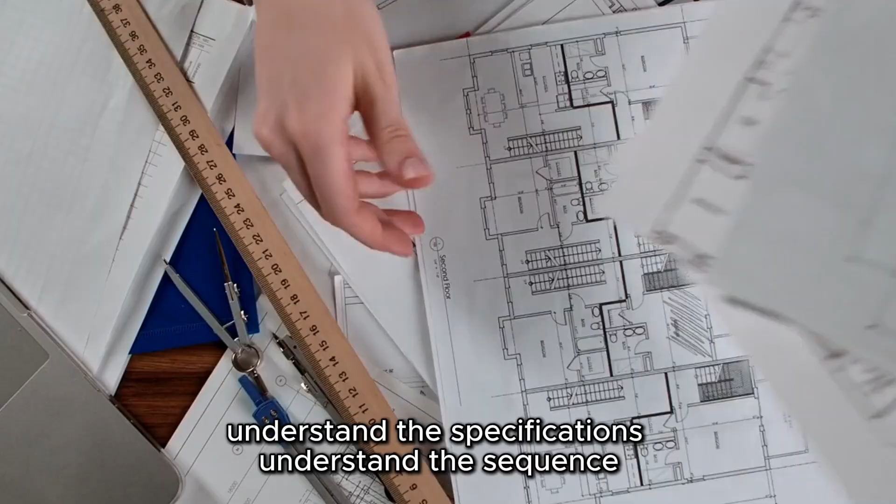So during this program, do not study only for your assessment. Study so that you can walk onto a site and understand what is happening. Learn the vocabulary, learn to read the plans, understand the specifications, understand the sequence, understand contracts, understand costs, understand quality, understand safety, understand people, understand the 10 building classes, understand the NCC, understand the relationship between the NCC and BCA.

Understand why Australian standards matter. Understand your state and territory requirements, and understand that every decision you make as a future builder or construction manager may affect cost, quality, safety, compliance, and ultimately the people who will use that building.

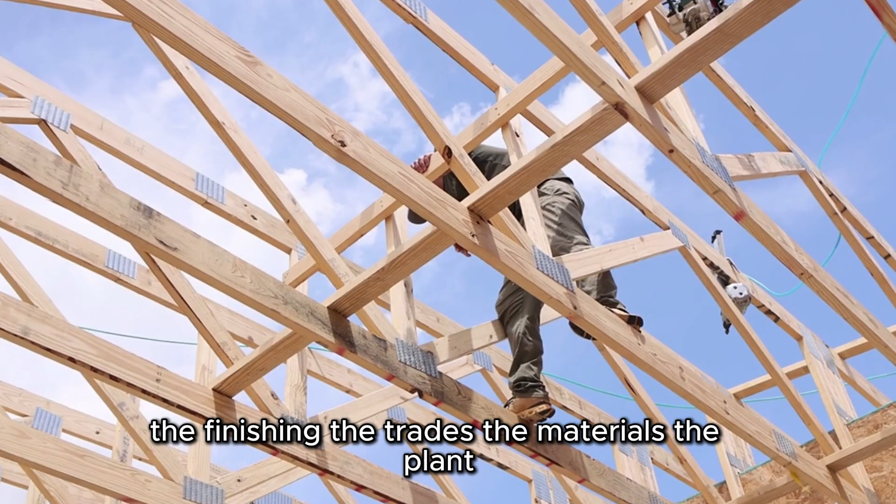When you next drive past a vacant block of land, I want you to see more than vacant land. I want you to imagine the complete value chain, the planning, the demolition if required, the ground clearance, the foundations, the framing, the walls, the roof, the lock-up, the fixing, the finishing, the trades, the materials, the plant, the contracts, the supervision, the inspections, the standards, the NCC, the compliance, and finally the people walking into a completed building.

That transformation from land to a safe, compliant and functional building is the industry you have chosen to study. And somewhere within that enormous value chain is your future career.

Some of you may become registered builders, some may become construction managers, some may become project managers, some may become site supervisors, some may work in estimating, some may manage contracts, some may establish your own construction businesses, and some of you may eventually employ and mentor the next generation of tradespeople. But everybody begins in the same place, by learning the fundamentals.

Today is that beginning. So I encourage you to ask questions. Do not be afraid to say, I don't understand that terminology. Do not memorize without understanding. Connect theory to what happens on the construction site.

Whenever you study a new subject, ask yourself, where does this fit into the construction value chain? Whenever you read an NCC requirement, ask, which building classification am I dealing with? Whenever you see an Australian standard, ask, why does this standard apply? Whenever you look at a drawing, ask, what happens next on site?